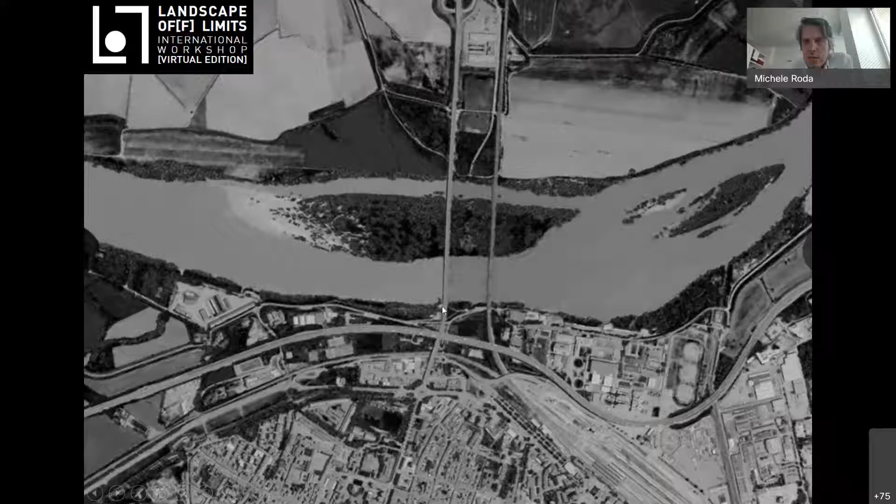So going into the theme, I think the contents of infrastructure in Piacenza. I'm giving you some slides, I think you can see it. The point is to understand this very chaotic and complex area we are trying to deal with. So the area in the northern border of Piacenza city, between the historical, more firm part of the city and the river, what's happening. And what's happening is a question to understand also the present role, criticalities and opportunities of the many infrastructures we can find there. In terms of urban design, we have tried to understand also what we need to focus on regarding infrastructures.

For sure, infrastructures are a question of accessibility. In Piacenza this is very clear. The different typologies of infrastructure meant in history, and mean also today, a strong level of accessibility. People can arrive easily, people can live easily in this area, people can see this area also traveling.

And this means also working about an area with strong permeability, porosity, and so accessibility. The second one is a question of impacts. Impact is not just something negative - there are some impacts that can also be positive. But for sure, infrastructure - and it's very clear on the natural environment, we can see also in this aerial view - infrastructure means strong impact in terms of pollution, for example, or noise. And this is what we are talking about, mainly about sustainability this morning.

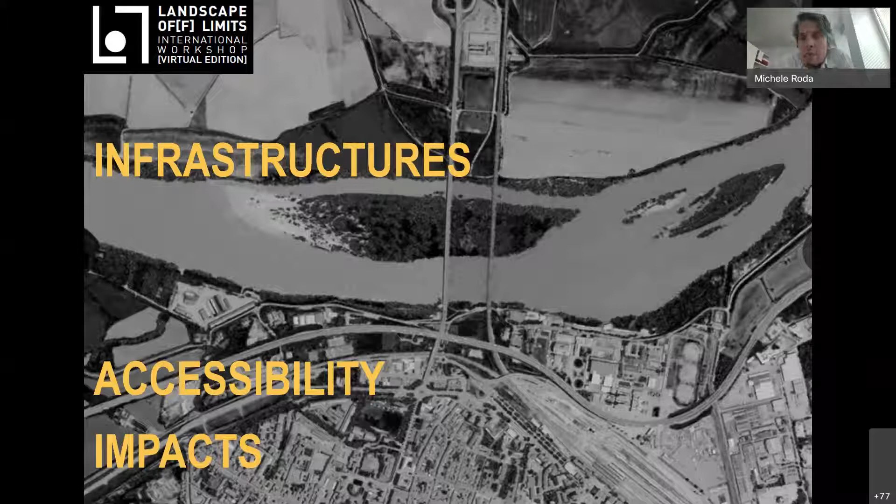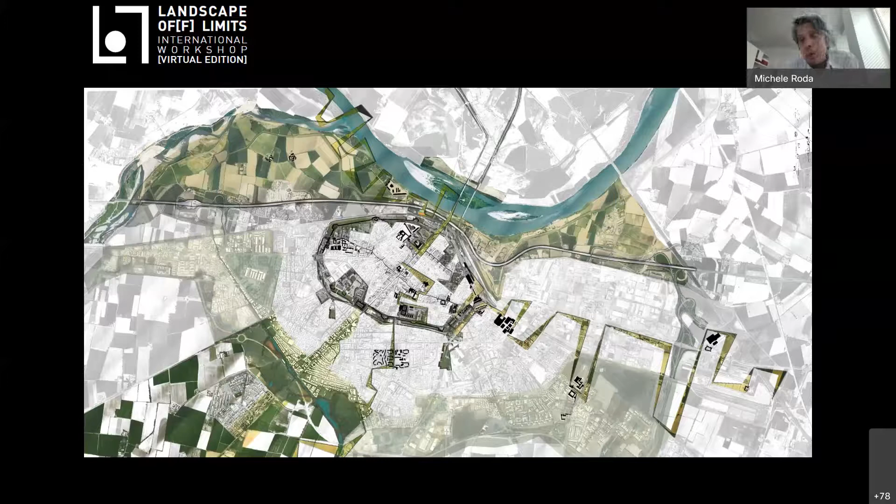It means also impact in terms of landscape perception. Imagine - we have seen some, now I'm passing through some images taken in Piacenza in these days. You can take also, if you are in Piacenza during this workshop, the viaduct, the bridges, the barriers are creating some limits, some important and strong impact on the perception. The area in this view - understanding the connection between the landscape elements, and exactly at this point where the buffer zone we are facing is becoming narrower and narrower, the infrastructures are condensing, they are more and more dense and intense, and the infrastructure are also defining a complex and contradictory relationship with the landscape itself.

So this is the play board of our workshop. We have discussed the opening on Tuesday, our work. We have talked about the two bridges. Now we are focusing better. We are talking also, and we need also this scale, because one of the highways in Piacenza is passing here. So Piacenza in the north-south direction is strongly impacted and characterized by infrastructure.

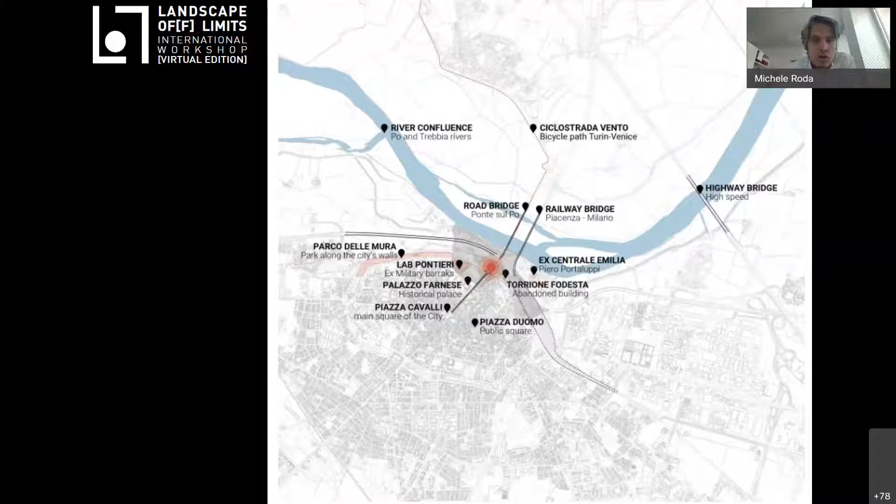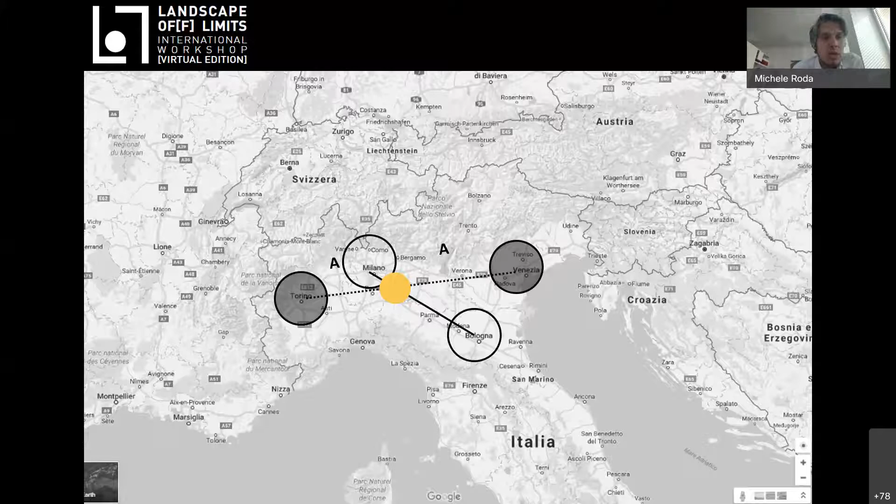This is the result of the strategic localization we have already talked about. Piacenza is in a sort of center, a sort of crux we can see in the cities and environment of northern Italy - between Milan and Bologna direction. Milan and Bologna direction is a part, a fragment of the backbone, we can say, of the Italian network system. So north-south, more or less, but also east-west, so Torino and Venezia, we can say Genoa and Venezia. But the point where these two axes are overlapping is very close to the city of Piacenza, to the area of Piacenza. We can see it also looking very briefly at some images.

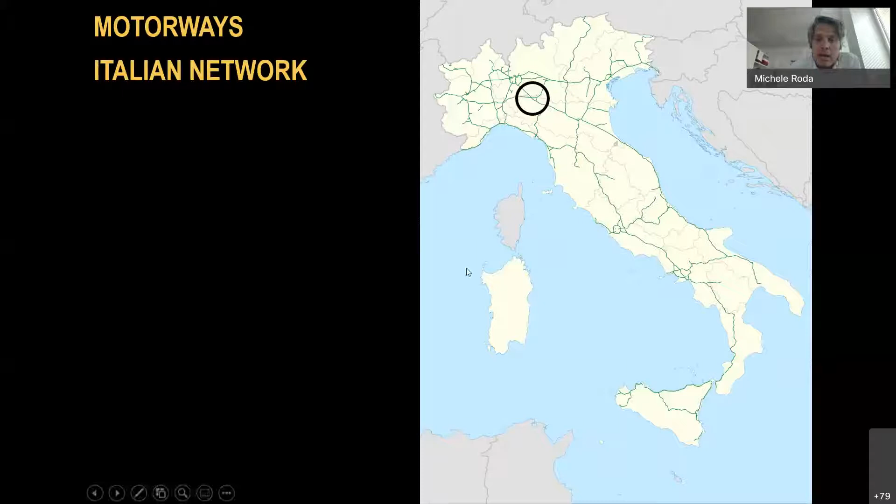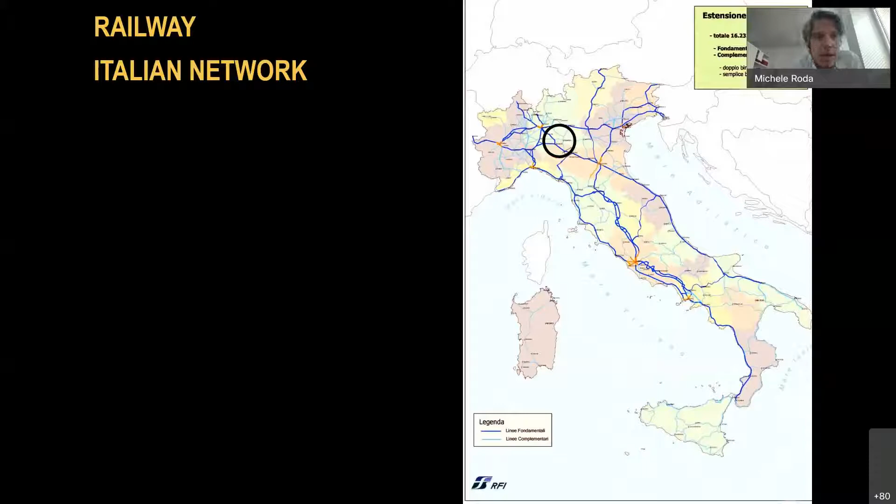This is the motorways Italian network, so all the motorways we can find in Italy. And the black circle, we can see deeply here, more here - two motorways are overlapping in this area. The A1, from Milano to Bologna, is this one, and the A21, called the Torino-Piacenza-Brescia, from Turin, Piacenza and Brescia - the overlapping, the cross of the two motorways, is exactly close to the city center. This means, I repeat, accessibility in my point. This is the reason for some of the characters and identities of Piacenza itself, but it means also impacts. It doesn't change - well, the strategic localization means also being an important node for the railway system. You can see here, in blue, the railway Italian network, where the blue lines are the most important.

Sorry, this image is not very good, but we can see that also in this case, Piacenza is the cross between the connection to Milano and Bologna, and the Piacenza-Alessandria-Torino line going west. The strategic localization of the node is very clear.

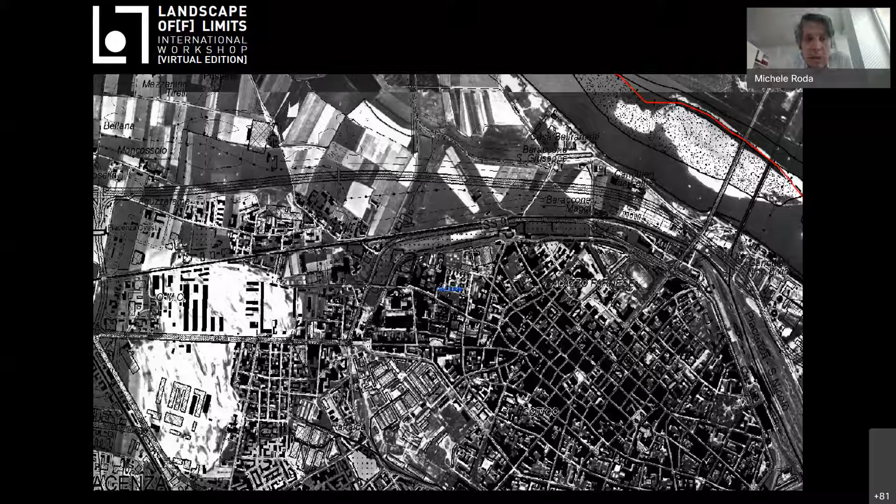What is the impact in history? We can see quite clearly in this image where we have tried to overlap the natural condition - we can see natural forms and shapes, and agricultural lands, which is a particular type of nature - but we have tried to put some of the lines, the motorway, the railway, overlapping on the territory. This crash, this meeting, created the contradictory and emblematic conditions of the area we need to face, and we are trying to show this, I think quite clearly, in this aerial view.

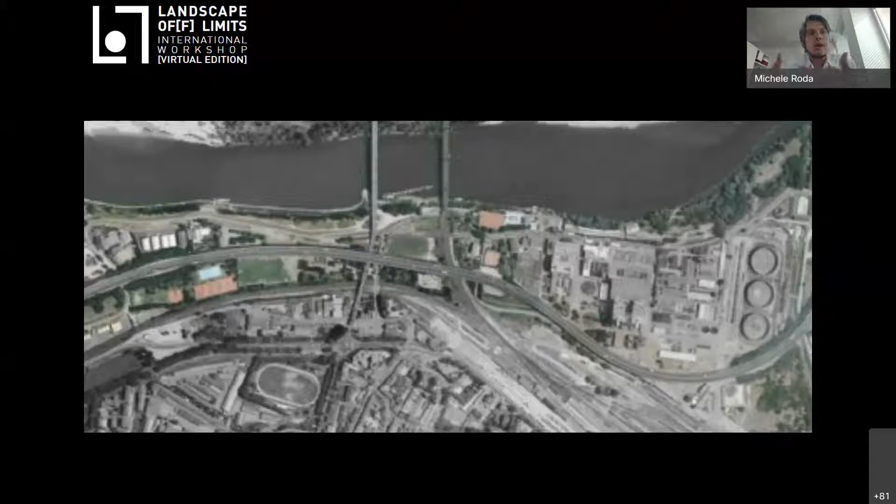Now we are trying to give a name to different lines. If you don't know quite anything, it's a sort of strange spider net of lines without hierarchies, or with very few hierarchies, with some clear direction: the two bridges bypassing the Po River, and with a main east-west direction of lines and strips. Each line has a role, each line has an identity, each line has a vocation. But what is important, from an urban design, landscape design point of view, is the overlapping and creating of a system of barriers. So let's go deeply into the different infrastructure, different lines, different elements we can recognize.

Let's start with number one, the most important I guess - sometimes we don't recognize that a river, the main Italian river, is an infrastructure. It's a blue infrastructure, we can say. The water flowing from here, from west to east, from the mountains to the Adriatic Sea, is a strong infrastructure, and is the main infrastructure you can find. An infrastructure that maybe today has no role and value in terms of economic travel and so on, but that it's a fantastic infrastructure opportunity in terms of landscape and natural elements, and also in terms of opportunities to improve the quality of the area.

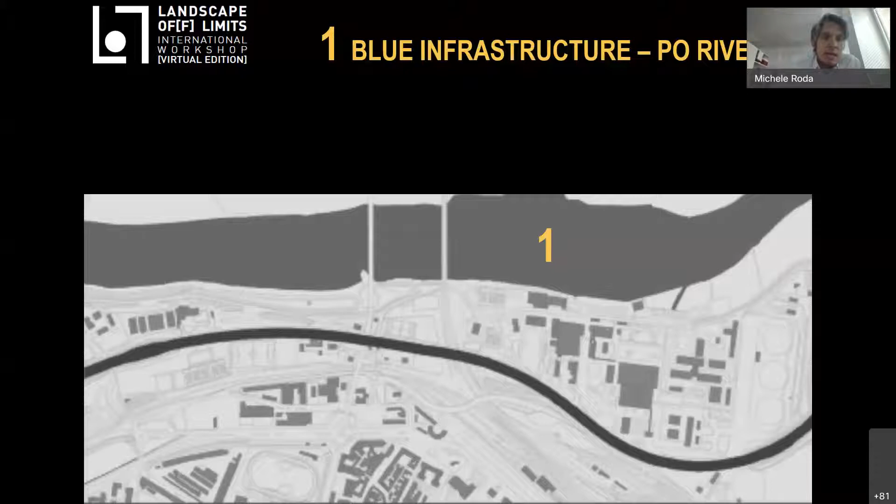We have two bridges, we can see it clearly in some images. Now I'm showing another image. The first one is the road bridge - that is not a motorway, I mean it's a normal street. It's a national level street, the so-called Via Emilia, along one of the historical corridors.

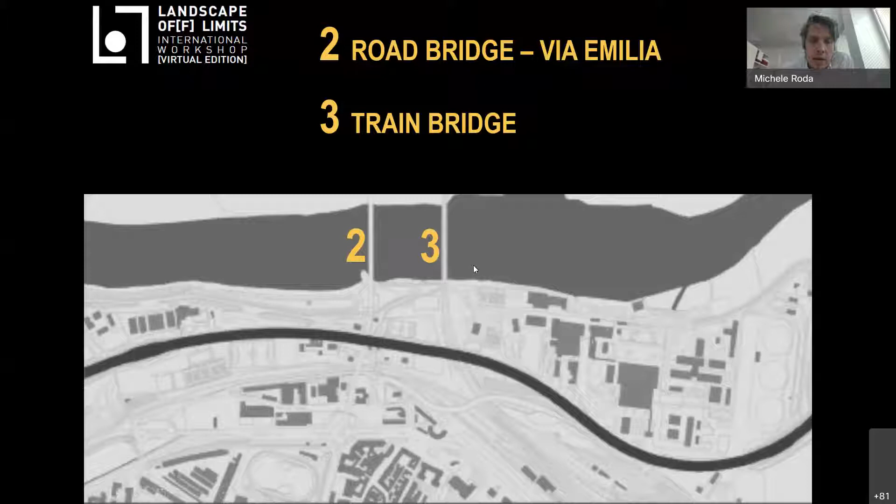It's a road you can also walk and ride on. And if you remember, on the first day we talked about the cycle path connecting north and south. So there are bridges connecting two sides of the Po River coast, connecting also two regions - Regione Emilia-Romagna on the south and Lombardia in the north. One is the road, as I said, and the second is the train, the railway bridge. This is an image I like.

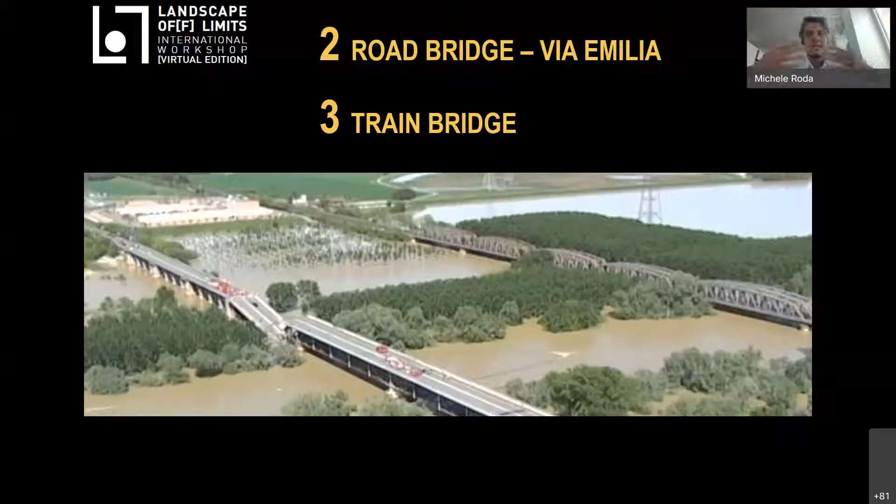This image was taken in 2009 when the road bridge collapsed during a flood. During the next month and year it was rebuilt in the same area. But I like this image because it shows that the bridge is not just the part bypassing the water on the Po, but the floodplain of the river is also larger - when overflowing, you can see it extends some kilometers long. The two bridges, the road one and the railway one, are also lines in the territory, creating strongly a direction, but creating also a sign in the territory at, let's say, a large scale view.

I have looked through some data - more or less every year, 5 million people are traveling on this line, not in the station but on this line. That is an important number. A lot of people are bypassing Piacenza, not stopping here, just traveling in the north to south direction.

Please take note that this is not a high capacity railway line. When, some years ago, 10 years ago, the TAV, the high speed train, was built on the line between Milano and Bologna, because of technical reasons the train doesn't pass through Piacenza station. So the trains run on a different line on the east part of the territory, meaning the high capacity line doesn't pass through Piacenza.

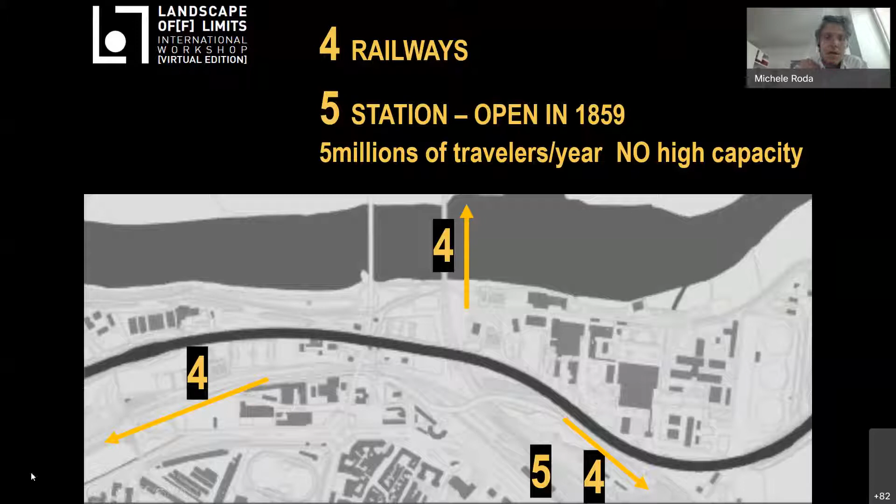But there is another line, a minor one, less used and less important in terms of flows of people, that runs in the east-west direction. From there some railways go to Alessandria, towards Piemonte. In terms of hierarchy, imagine this is the main line stopping in a station, this is the second line also arriving for sure in a station, and this is the reason for the node.

The area is also impacted by a very important viaduct built in the 60s, part of the A21 motorway. The A21 connects Torino, Piacenza with Brescia, in an east-west direction. It's not one of the most important motorways in Italy.

I found this data, which I think is quite updated: more or less 40,000 cars and trucks travel every day on this road, passing through the whole northern barrier of the city. More or less half and half - 20,000 cars and 20,000 trucks, for commercial activity.

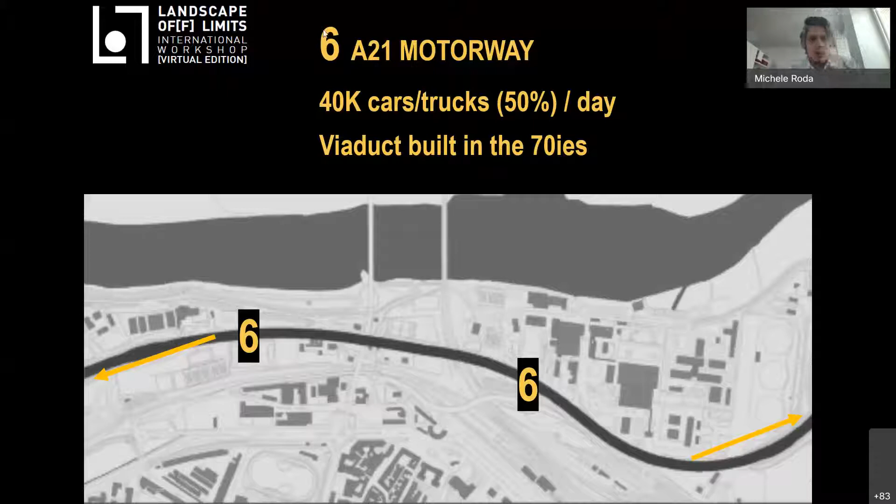This means that, also in relation to other motorways, the commercial role of this viaduct is very important. The viaduct, which is strongly impacting as we've seen in a lot of photos, was built more or less in the 70s. Then there is the national road network.

This is the one passing on the bridge - this is the image of the bridge that collapsed in 2009 that I was talking about - arriving here at the epicenter of our area, Piazzale Milano, the area connected to Milano. From here there is a Strada Statale, a national level street connecting the east part and west part of the city. The west part then becomes the Via Emilia, connecting the different cities along Emilia-Romagna, from Piacenza to Rimini - Parma, Reggio Emilia, Modena, and then Bologna.

Number 8 is quite important and strongly impacting as well - a sort of bypass, a new road built a few years ago, bypassing the railway. As you can imagine, this network creates a condition of overlapping and contrast. The problem was that because of the railway line it was quite impossible to get with the normal road network from the southern part of the city to the northern part. So this bypass was built, which we can see now in some images.

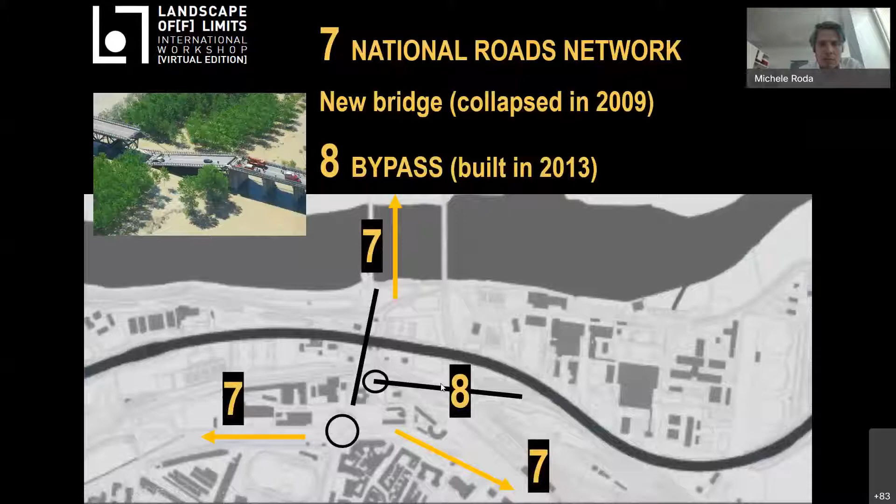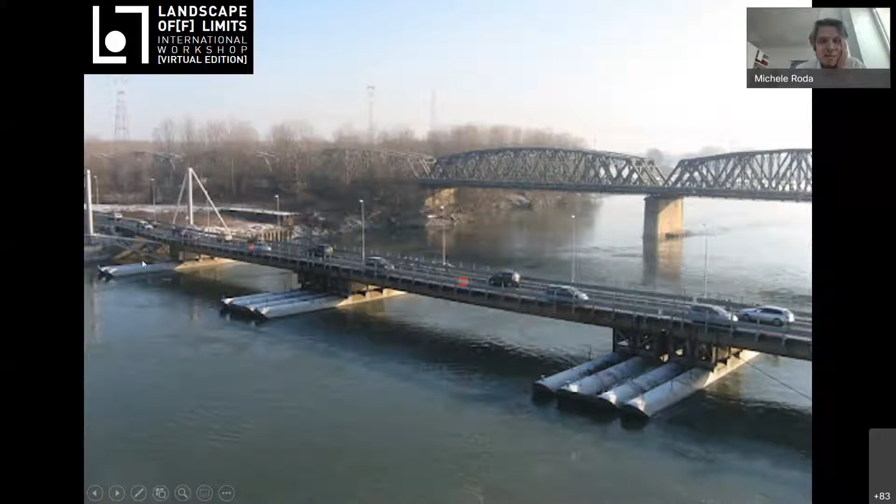This is another very exemplary and emblematic image taken when the bridge collapsed. For a period a temporary bridge was built on the river - you can see the temporary boat bridge here and the railway bridge here.

Now I'm passing through some images, trying to give a sense of the impact of infrastructure in this part of Piacenza. This is the beginning of the road bridge, and this is the viaduct of the A21 motorway. The impact of the viaduct is not just the presence of a barrier, but also this phono-absorbent element - I don't know if that's the right name - able to protect the city, but creating an impact in terms of landscape, as you can see.

Because of the different levels I mentioned earlier, we have a lot of bridges. This is a bridge at the Po level, and we can see the urban level, and the new street level.

This instead was taken at Rione Fodesta, one of the identity elements you are also called to involve in your project. We can see the recent bypass, the last part of the road system built, this one here. As you can imagine, maybe it works in terms of technical and transportation systems, but it creates an element blocking the view, strongly interrupting the connection from the city to the river because of this infrastructure system.

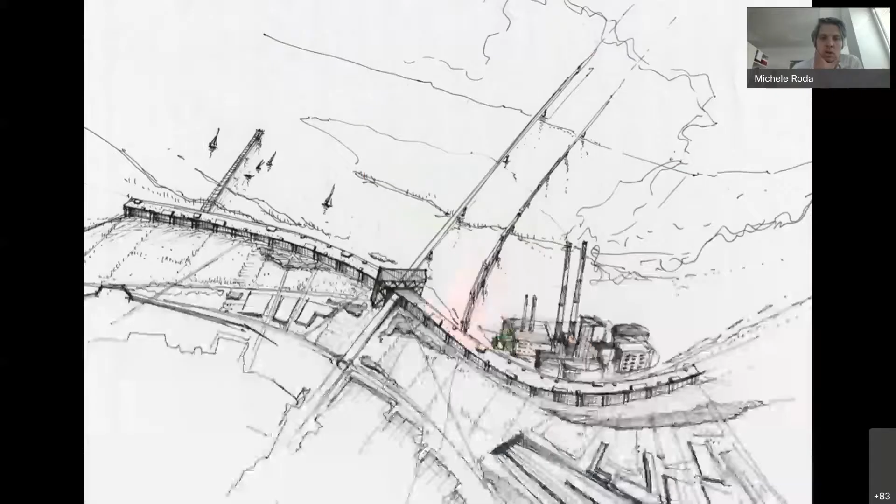These are just some images taken to let you understand this limitation. That concludes the last two slides - now I'm giving the floor to the colleagues, who will focus better and more deeply on the contents of infrastructure and sustainability.

These images are taken from a recent experience we had in Piacenza, Politecnico di Milano, in some workshop. This was a project made by some students working on a transformation of the viaduct. As you can see, this is the line of the A21 motorway with the two bridges, and this is the anchor point from the city. The idea is that it's possible, as you can see in this image, to think of infrastructure in terms of landscape.

Edoardo will later talk about this point. Our role, our effort, has to be addressed to understand how this complex and contradictory condition can be transformed through our work, which is urban design. So I hope I introduced this morning session in the right way.

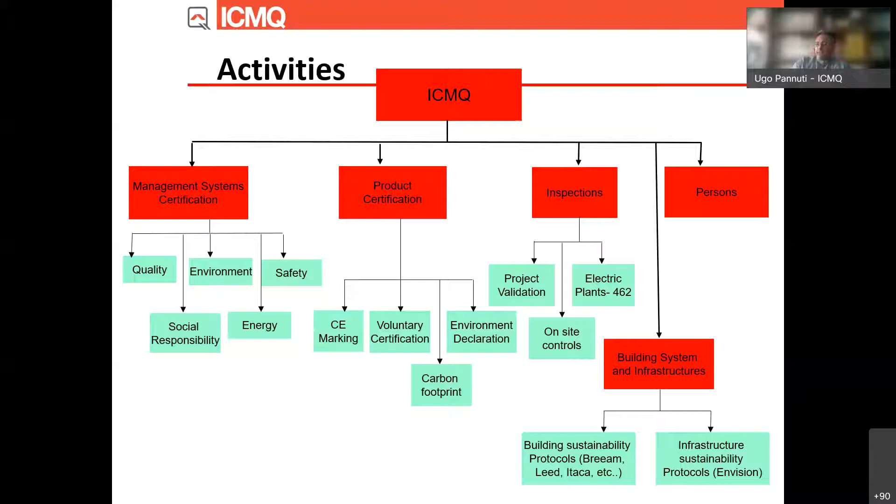The key point is to design in a sustainable way. But what is sustainability? Sustainability is the intersection of three spheres: the social sphere, the economic sphere, and the environmental sphere. Each of these spheres is linked to a word: social is linked to people, environmental to planet, and economic to profit. So if we design infrastructure, a building, or a product taking into account the 3 P's—planet, profit, and people—we are designing in a sustainable way.

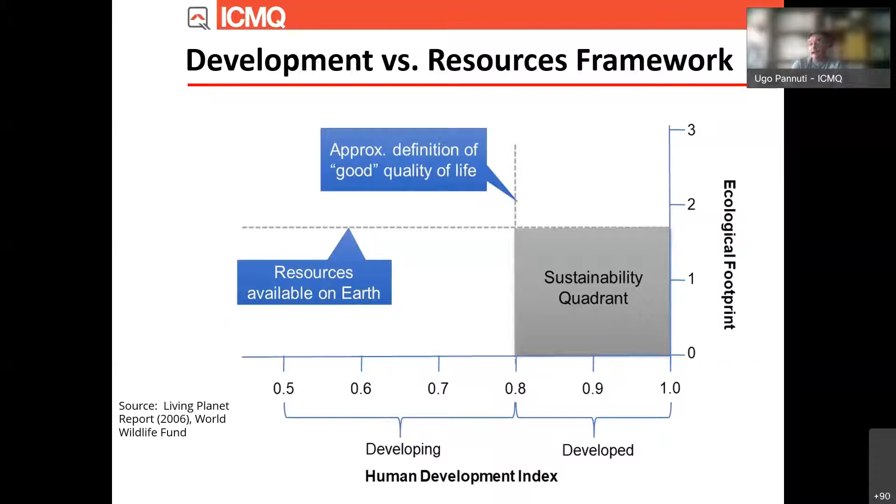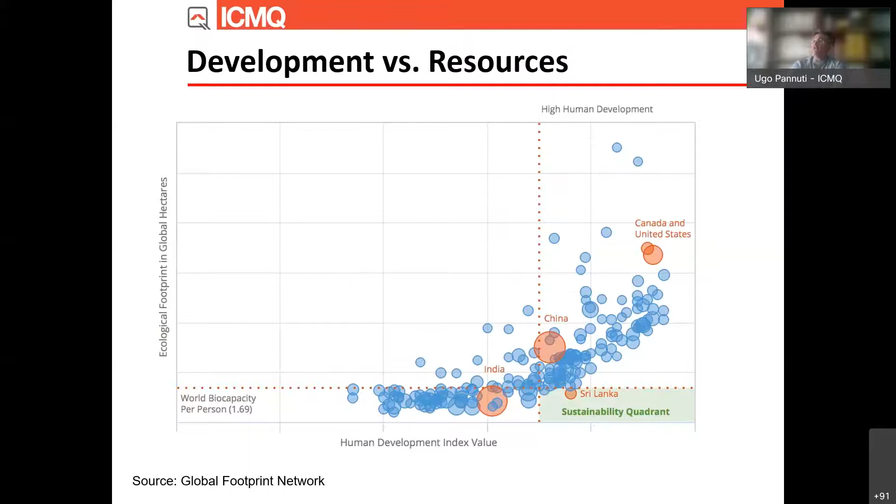and the horizontal line at about 1.7 hectares per person. In this sustainability quadrant, I have a good quality of life and I don't consume large resources. If I put some data in over the years, I see that there are some countries that don't have a good quality of life and don't consume resources, and there are a lot of countries like Canada, United States, and others that have a good quality of life but consume a large amount of resources. So the challenge is how we approach this problem to move into the sustainability quadrant.

Some manufacturers approach this problem from a micro approach, with micro changes and product-level strategies. We know a lot of manufacturers involved in the sustainability field that design products with, for example, an Environmental Product Declaration, EPD, or carbon footprint declaration, to account for environmental impacts or carbon footprint impacts. Other manufacturers would like to manage their company system with a standard, ISO 14001 environmental management system, and other manufacturers or public administrations would like to approach the problem with macro changes, through infrastructure design. Envision is the protocol that helps us approach this problem in a sustainable way.

Infrastructure is important because it brings goods to the market, for example workers to their jobs, or children to school.

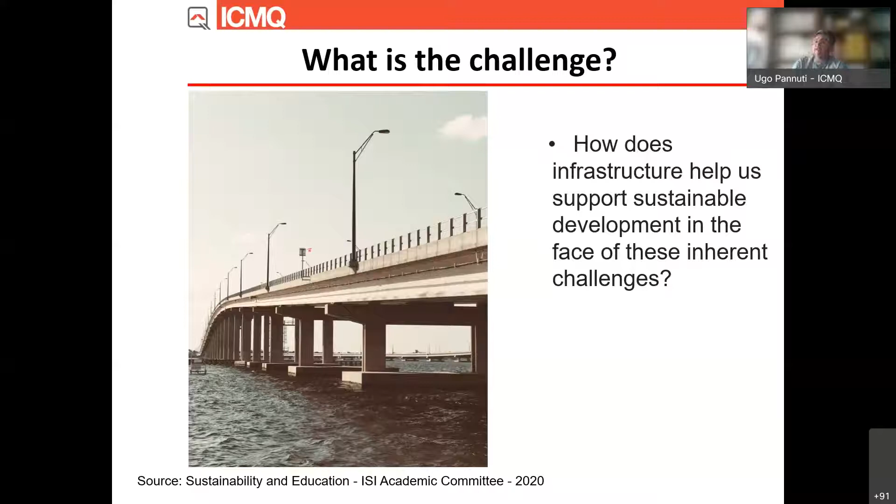So the infrastructure is important to have a good quality of life. But it's important that these social benefits are maintained over the long term, without a big consumption of resources. So it's important to consider the life of the infrastructure, because we have different years, for example 20 years for highways to 100 years for dams.

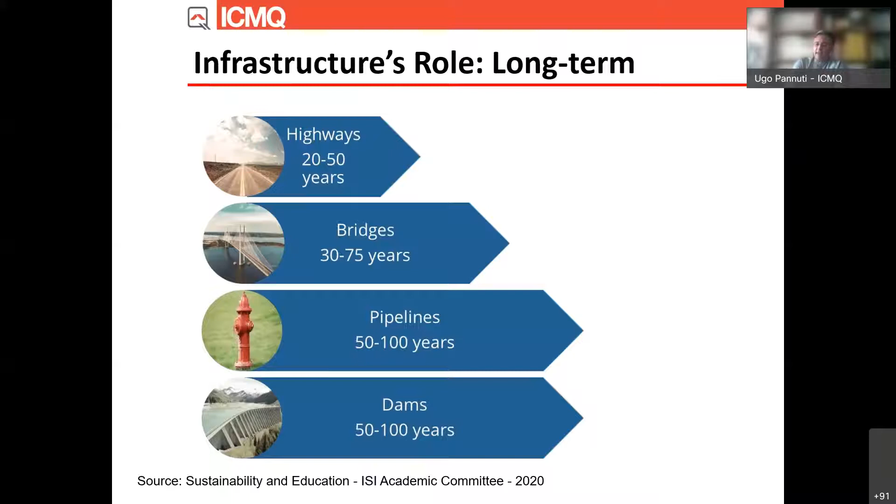So it's important to take into account the life of the infrastructure to design it in a sustainable way. To close this short session, I'll report some strategies for changing the industry for designing infrastructure in a sustainable way. To make incremental improvements, it's important to approach the design without aiming for a big level of sustainability all at once. I think it's important to move the design forward step by step.

Use a standardized tool and metrics. The Envision protocol is the right tool, the right standard, to document sustainable practice. Monitor performance over the years, to have a good economic approach to the design. Sharing lessons is a key point for infrastructure design. And have a global view while keeping in mind local values, the quality of life, and the local point of view of the infrastructure. It's important to design the infrastructure this way.

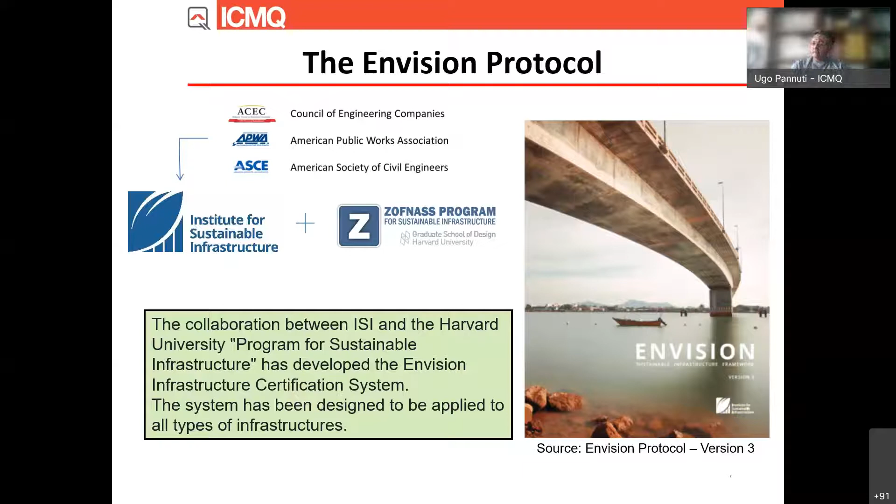In Italy, ICMQ made an agreement with ISI, the Institute for Sustainable Infrastructure, to develop Envision and spread the protocol in Italy. ICMQ performs its activities with the Envision protocol as a third-party independent certification body. At the moment we have verified some important projects, we have qualified some professional competence, and we perform training and qualification.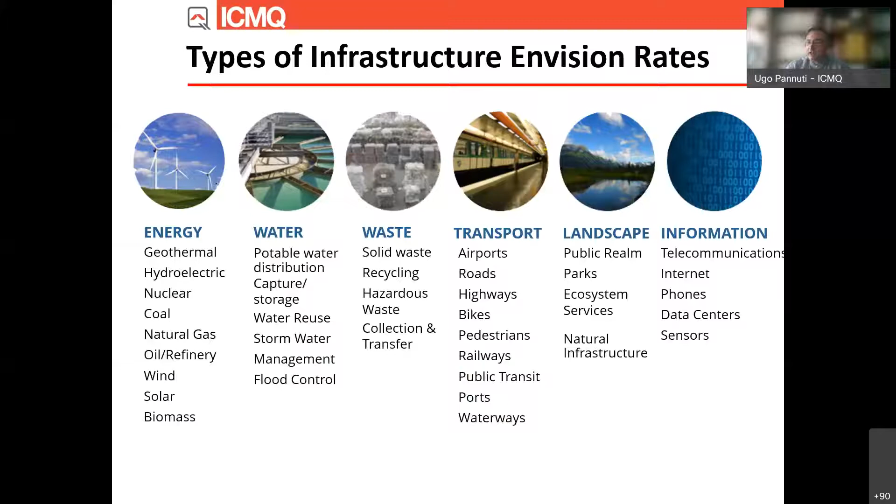Envision can be applied to all types of infrastructure. It's the equivalent of LEED for buildings. We can apply the protocol to energy infrastructure, water infrastructure, waste, transport, landscape, and information infrastructure. It's composed of 64 credits subdivided into 5 categories.

You can see that the categories are quality of life, leadership, resource allocation, natural world, and climate and resilience. I think, I'm not sure, but I think that the resilience key point in climate and resilience is a point that doesn't exist in other protocols. I think Envision is the only protocol I know that performs its activities with consideration for the resilience of the infrastructure.

I'll show you some information about the categories. The first one is quality of life. It's divided into three macro categories: well-being, mobility, and community. It's important because I design infrastructure thinking about the community. How can I design the infrastructure taking into account community needs? How can I improve the quality of life of the community with my infrastructure? This is an important category.

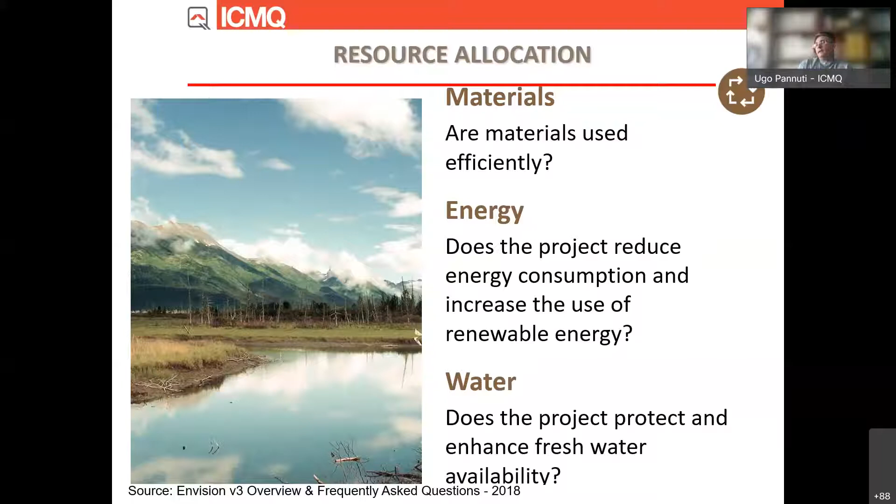Resource allocation is about the materials. My thinking is that a sustainable infrastructure is composed of sustainable products. So we have materials, energy, and water, taking into account the certification of the materials that I use in the infrastructure. I award points for the environmental product declaration of the materials I put into the infrastructure, or for activities that can achieve energy saving or water saving.

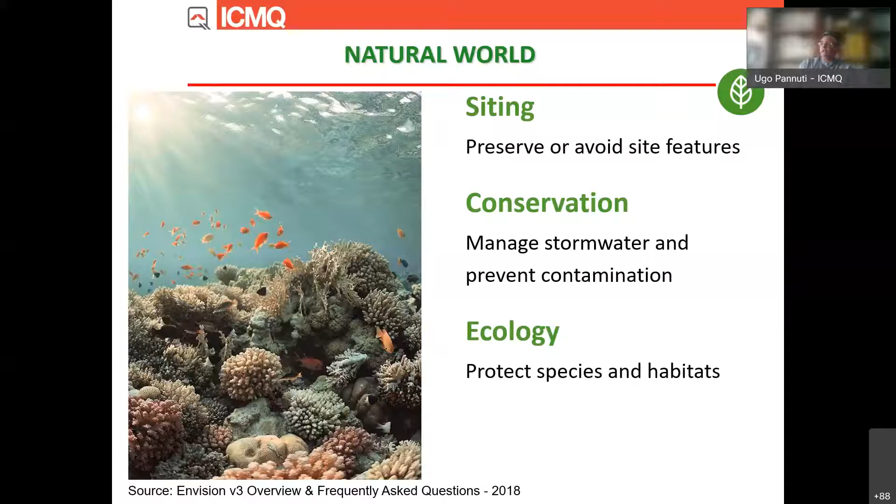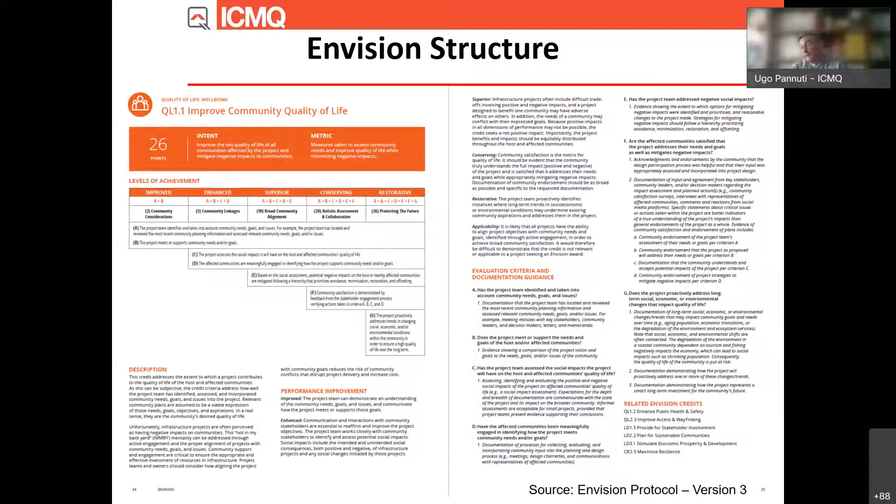Natural world is about the effect of the project on the preservation and renewal of ecosystem function. We have three macro categories: siting, to preserve or avoid site features; conservation; and ecology, about protecting species and habitats. Last but not least, climate and resilience is about minimizing pollution and managing risks of the infrastructure. Every category, every credit, is composed of a title, points, the maximum value of points I can achieve, the goal and intent of the credit, and the metric.

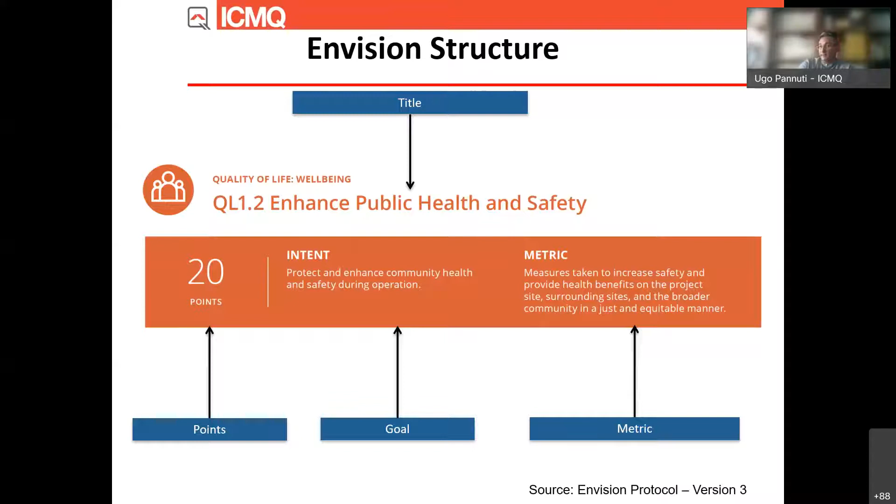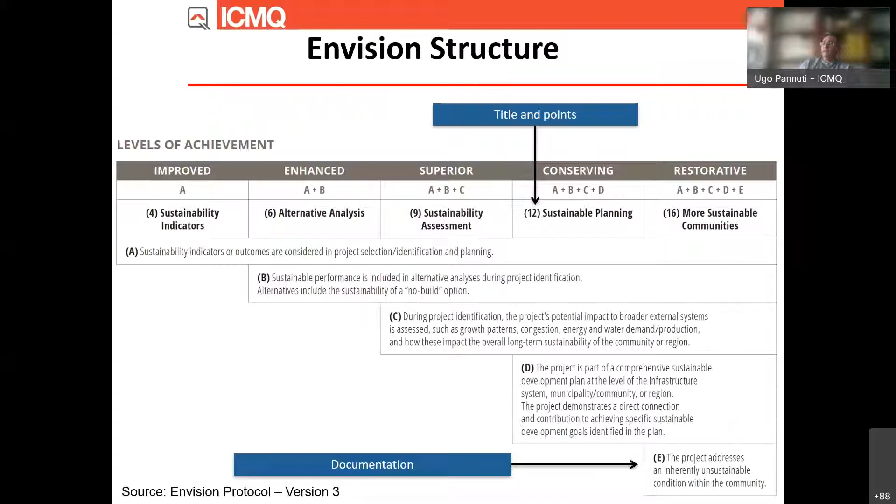How can I measure, in this case, the quality of life? I have to document the effective levels of achievement. We have 5 levels of achievement: improved above the conventional, enhanced - I am on the right track for designing, superior but not net zero, conserving - I have zero negative impact, and restorative - I restore systems with my design.

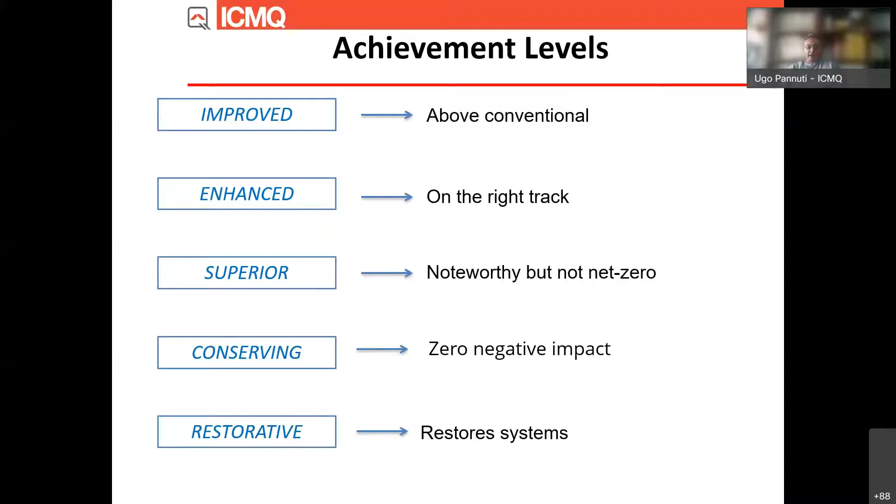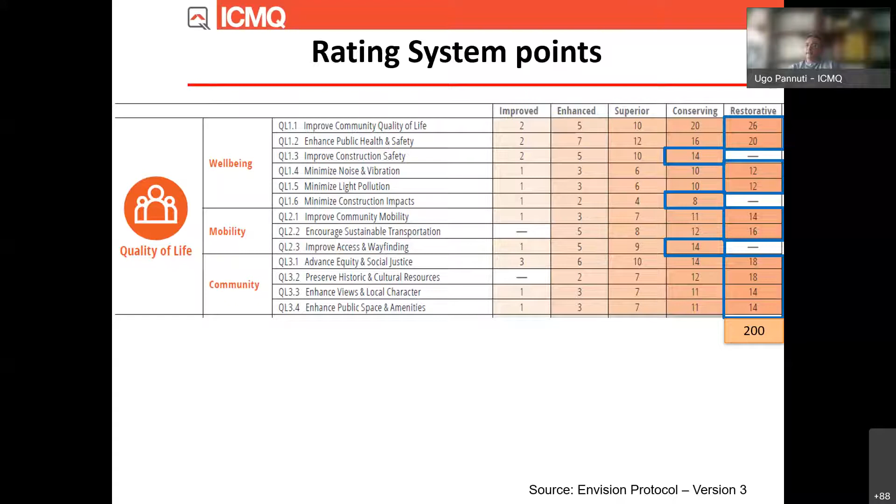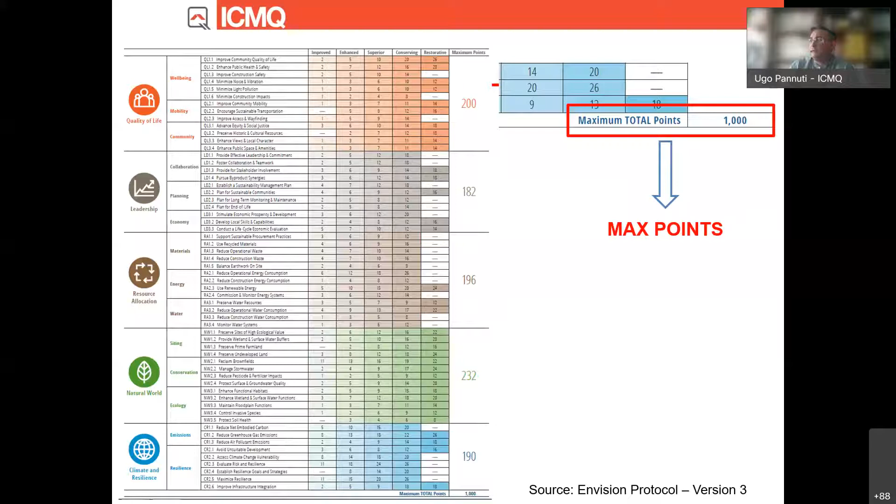Every category has a maximum number of points. If I sum all the points of all the credits, I can have the value of my sustainable designing, and I can divide all the points by 1000, that is the maximum value of points that I can reach. We have the level of certification.

Verified if I have 20%, silver 30%, 40% gold, and 50% platinum. It's very hard to reach the verified level, but I know that if I have a verified certification, I am designing an infrastructure 20% better than the standard benchmark.

The certification process is divided into two paths. Pathway A, design plus post-construction, and pathway B, post-construction. In the first pathway, we have two steps of certification.

We have a certification after the design phase and after the post-construction of the infrastructure.

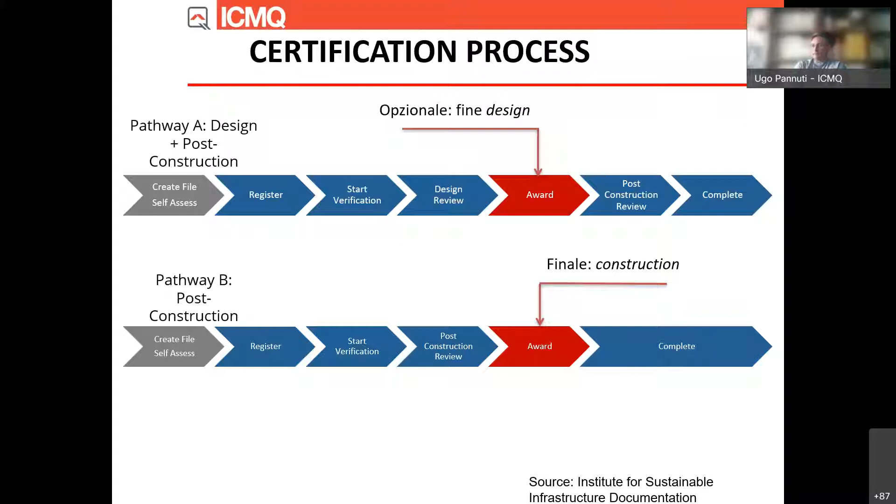ICMQ performs training activities to qualify the competence as Envision Sustainability Professional, Envision SP. That is an important point of contact for the project team with the certification body, with ICMQ.

The Envision SP is an expert of the Envision protocol. It is important to achieve, to reach all the levels of achievement. The process of qualifying an Envision SP is composed of two steps.

We have a training course and an exam in double language, Italian and English, with 75 questions. To have the qualification, the candidate has to answer correctly 75% of 75 questions. And then we have an annual maintenance of the qualification.

In Italy, ICMQ has developed some documents very fast. We have developed guidelines for the application of the Envision protocol to Italian railway infrastructure with Rete Ferroviaria Italiana and Italferr. We developed an alternative compliance path document, how to apply the Envision protocol in Italy.

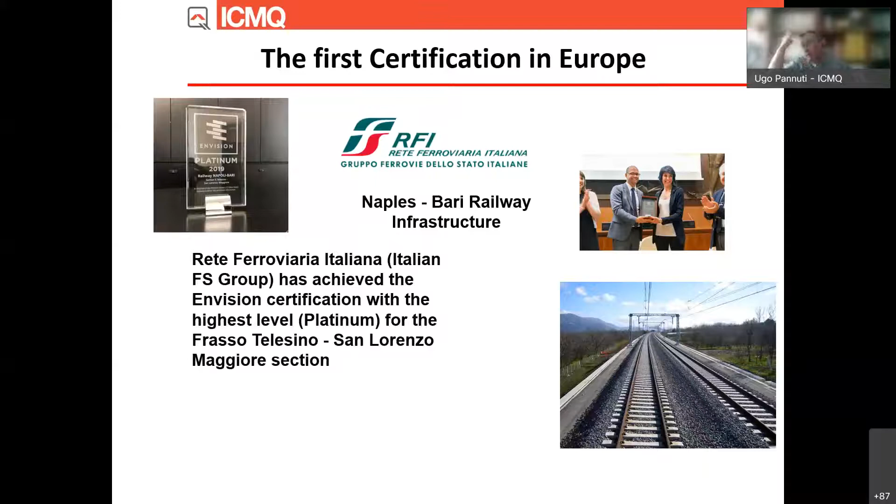part of the Naples-Bari railway infrastructure with Rete Ferroviaria Italiana. They achieved the platinum certification. Another certification with Edison's Vaglio wind farm, a gold level.

The third certification is about Impresa Trevi with Life Marina Plan Plus, that is a structure under the sea, the Adriatic Sea, for coastal management, with a silver certification.

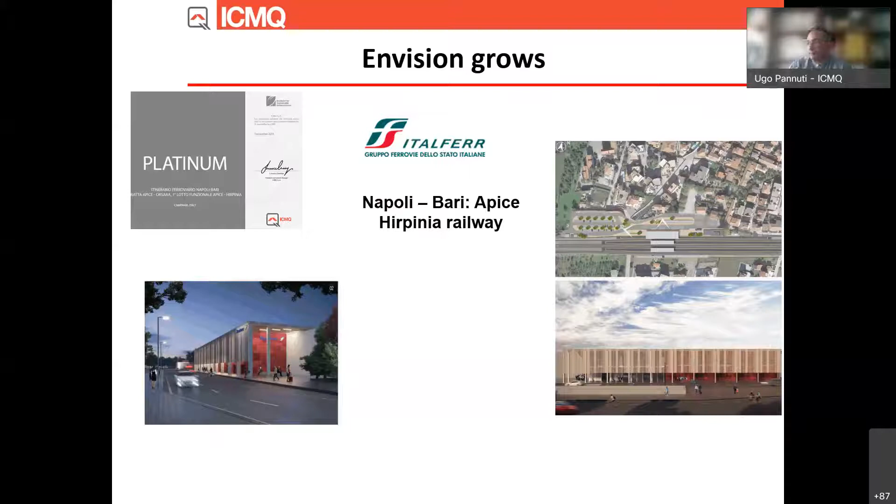And we have some other certifications: another part of Naples-Bari with platinum certification, Edison with another two wind farms in Abruzzo, platinum certification. We have some registered projects almost ready for the certification phase, railway for the connection of Marco Polo Airport of Venice,

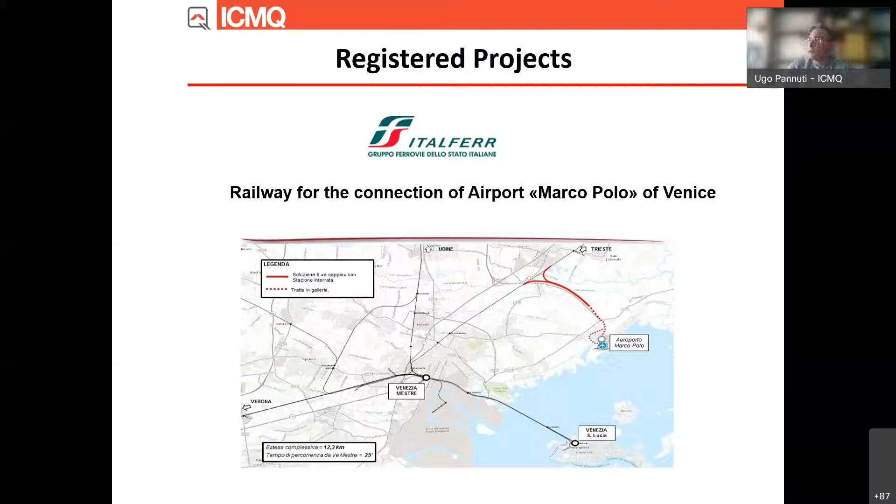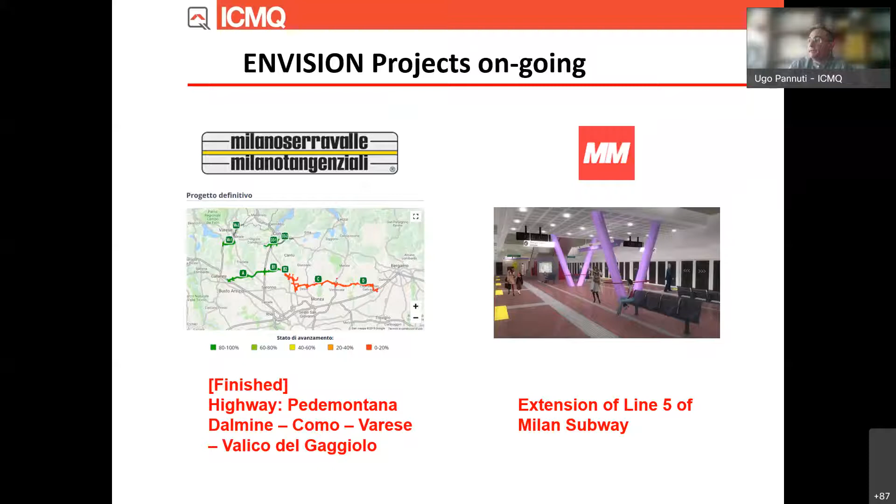Milano Serravalle, it's finished. We have performed a preliminary assessment of Pedemontana with MM, ex Metropolitana Milanese, extension of line 5 of the Milan subway. We have some other projects of Rete Ferroviaria Italiana: Porta Garibaldi Station, Piazza Freud in Milan, Frosinone Station, Porta Romana Station, and the high-speed railway in Florence with the station.

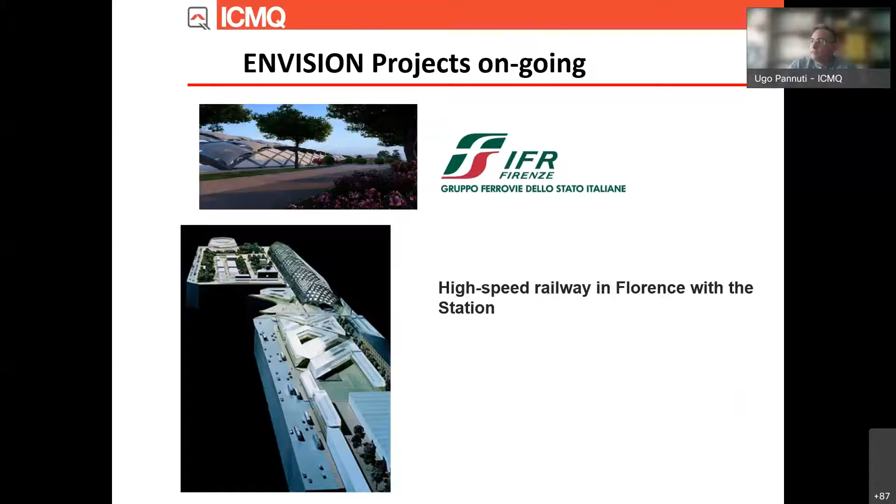And in Europe, we have performed a preliminary assessment of a dam with Seacon Engineering.

I have finished. I hope that the time is okay. This is our reference. If you would like to have some information, you can take a look at our website, Envision Italia. And if you need some information, you can write to me. Thank you very much.

Thank you, Ugo. And please, everybody should be aware that ICMQ is exactly in front of the Bosco Verticale. So if you go and visit them, you can see the Bosco Verticale, that is the well-known skyscraper in Milan, full of vertical wood, isn't it?

Okay, so I'm ready for my presentation. What everybody has seen in Ugo's presentation is that Envision is a protocol that has a very broad field for being applied. So, okay, now I can share.

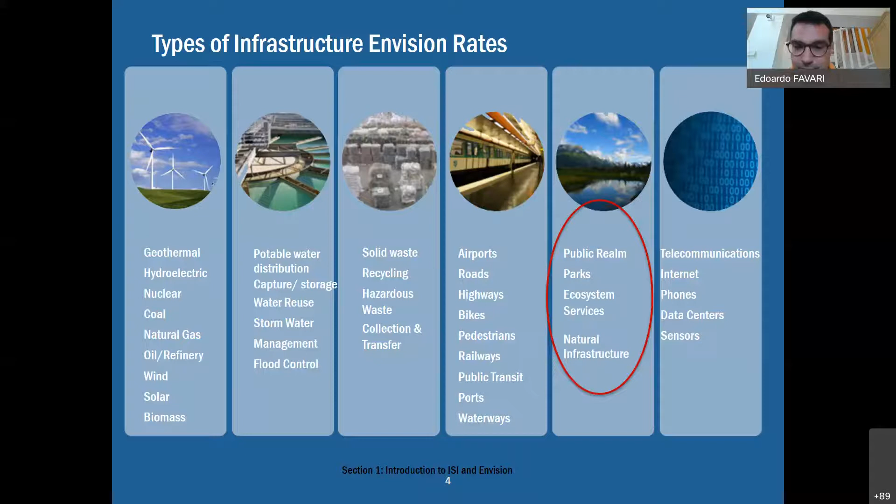So in particular, here just to let you see that it is perfectly suited on purpose for landscaping, and you see, from Ugo's presentation, that there are so many credits - you see 64. It's really a lot.

When you apply Envision, you have a sustainability professional who helps in applying and identifying the solutions. And for each credit, you have to see what can realistically be done.

If you don't have a brownfield, if you don't have waste in your project area, you can't get, for example, the maximum level for reclaiming brownfield, as you see in conservation credit 2.1.

So obviously you have to select some credits and decide how to focus on them. You have some hints from the Envision manual, and obviously you have to go into depth and find your own solutions.

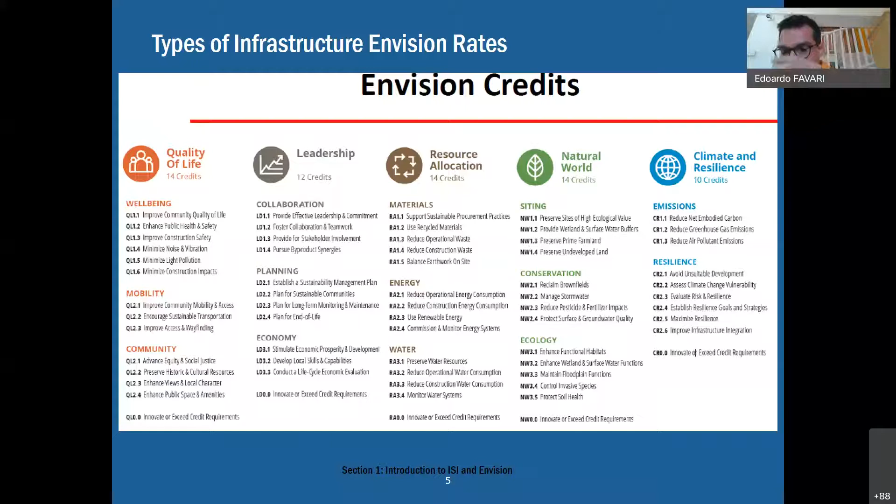Another point that Ugo pointed out, which is very meaningful, is that Envision has been developed in an American context. So, for example, if you apply it in Europe, and specifically in Italy - since we are thinking about Italy at this moment - you have to see what requirements and standards can be applied to your project.

The first project I want to talk about is the Willingdon Linear Park, built in Burnaby, British Columbia, Canada, which got the silver achievement in 2019. It consists of more than 1 kilometer of linear park, spanning 13 blocks of the city.

There's a level description that also talks about asphalt, which is something that maybe isn't usually relevant when thinking about a landscaping project. In this case, the asphalt has been reclaimed—the same asphalt that was already used before the park was built has been reused for the new one.

What has been done is taking an area that was not used, was overgrown with vegetation, and it has been transformed into a park that is qualifying so much for this city.

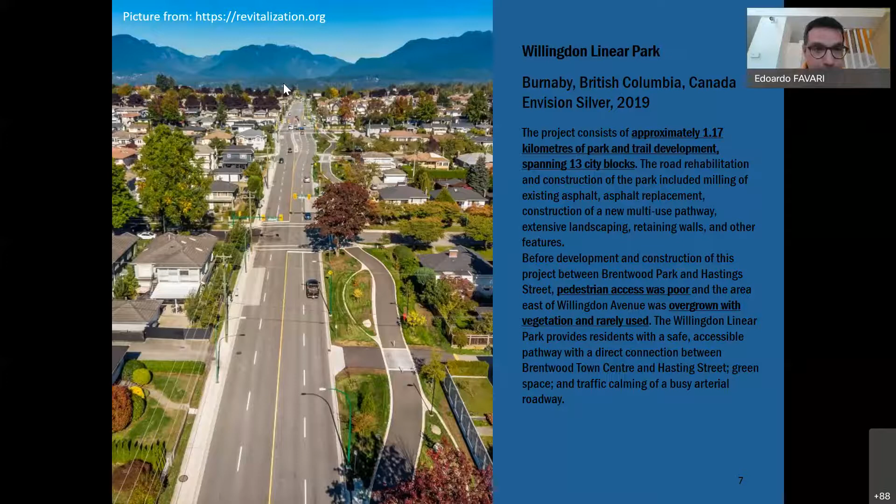You see the linear park, the 13 blocks can be seen here. As it is linear, mainly you have pedestrian paths and biking paths. In some points, it has been possible to enlarge somehow to include extra facilities for meeting, gathering, etc. I think that is interesting.

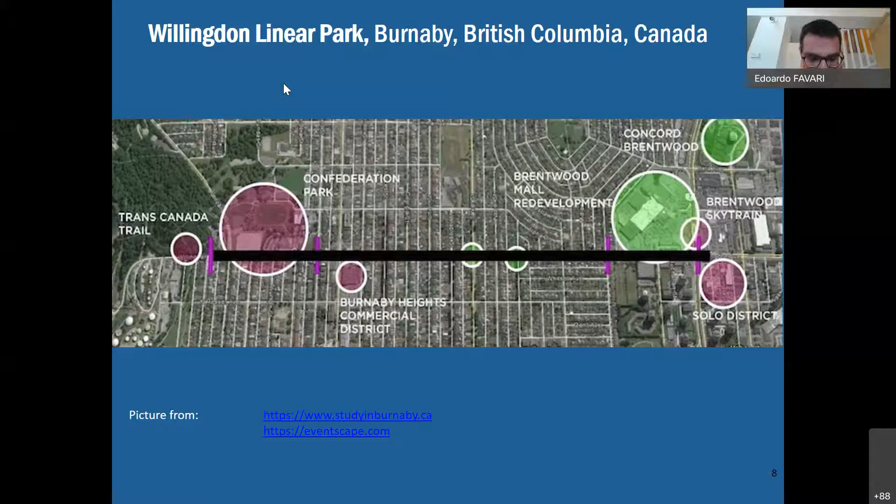If you see the references below, one of the pictures has been taken from a study in Burnaby. So it is something that makes the city more attractive also for students.

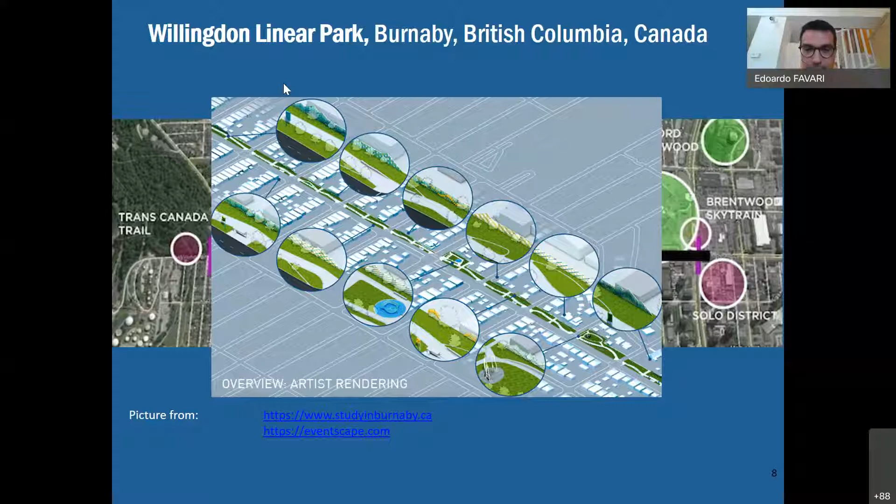Regarding the part of quality of life, you will see for each case study some highlights that describe what has been done and what is outstanding for this project.

Here, nothing exceptional, you see. For example, there are new pedestrian signals that improved accessibility and safety for pedestrians. Again, biking and walking pathways.

Feel free to raise questions. In addition, as I mentioned, where possible, there have been built pocket parks—some space for gatherings, for chance encounters, and for quiet solitude.

So this is what has been done. Nothing exceptional, I think everybody's thinking—just this, and they earned a prize from Envision. The point is that if you apply a rating system, you are spurred to do one step more. Usually during a project review with Envision, you are spurred to do more and more because you ascend the level of achievement on the specific credit.

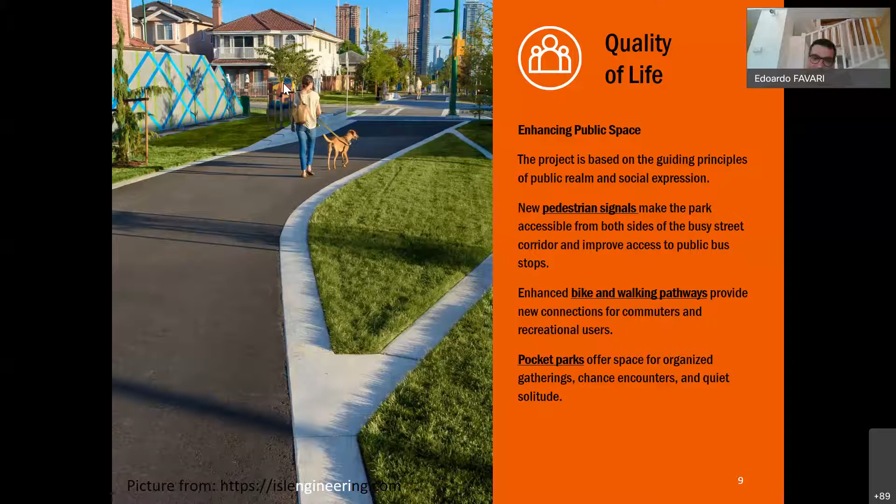Another topic that often is not considered as much in normal projects is the control of invasive species. Invasive species are plants that are not local—they've been imported in the past, and then they spread so much, almost outcompeting local, non-invasive species.

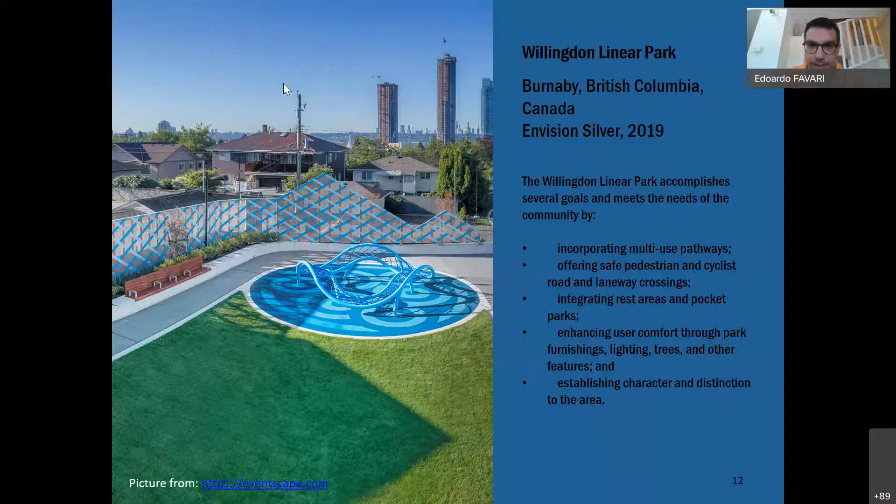Another project I want to talk about is the Albion Riverside Park in Los Angeles. It is a pretty big park because it's 10 acres, which is about 40,000 square meters, and it is adjacent to the Los Angeles River.

For this project, there was an industrial area next to the existing park that was degraded, not that nice. The Los Angeles municipality acquired the industrial area, improved the situation of the area, and increased the open space and recreational opportunities of the park.

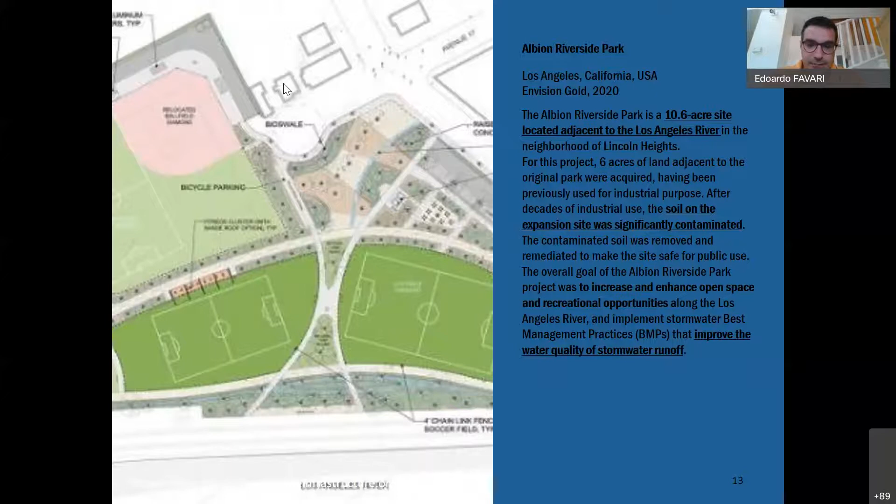Another goal of this project was to improve the water quality of stormwater runoff. It is very related to climate change. Everybody knows that there are big storms, and stormwater comes all together in a short time. The management of this event is critical for the resilience of the project. Another goal of this project was related to that. You can see that it is a pretty big area with so many recreational facilities and several trees.

This is a map that you will see in the presentation. I made this presentation available.

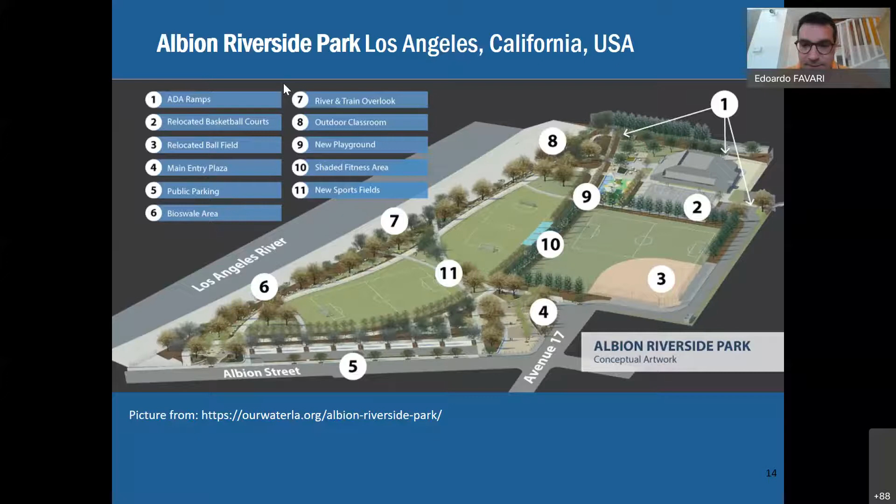This is a picture. One topic that has been outstanding in this project has been the quality of life. Obviously, such a park that makes available a baseball field, 3 soccer fields, a basketball court, a plaza and space for events, trails, fitness area, etc. improves the quality of life of the quarter. In addition, ADA compliant ramps improve accessibility for handicapped people.

So this is another topic that has been approached. Quality of life is something that has been considered outstanding.

One topic that has also been considered outstanding is the leadership part. According to my experience in project management, and particularly in sustainable projects, the importance of leadership is always underconsidered.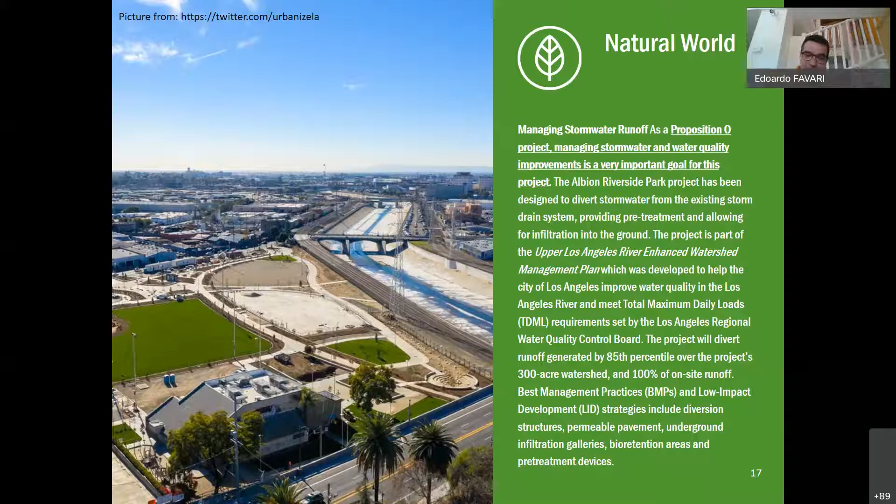Again, it is nothing brand new, it is not something unknown to us. But if you apply the protocol, you are spurred to go the extra mile, one step over. So at the end, in this case as well, it got the gold Envision prize.

Water quality was one topic that has been really outstanding, and in addition, the park is very relevant for the local community, improving climate change adaptability and reducing the risk of flooding in the area.

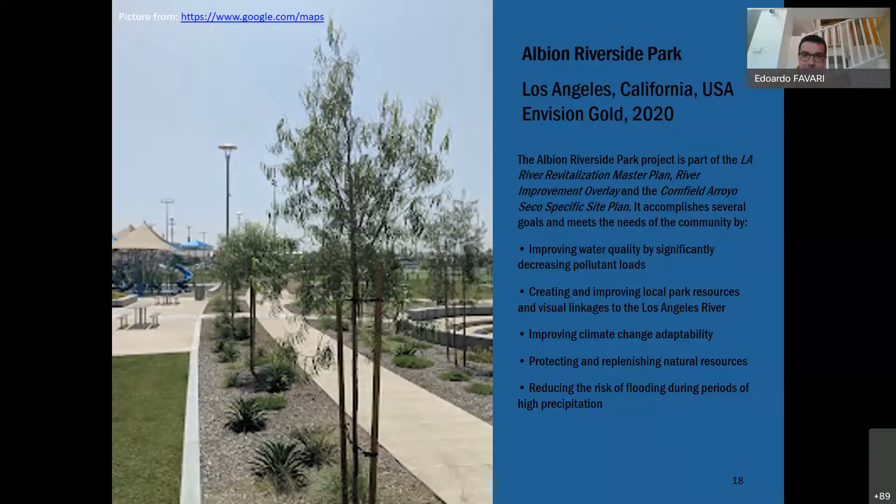Another project that is also interesting, according to me, is the Starlight Park that has been developed in the Bronx, New York City, which also got the gold achievement from Envision last year. It is a very big project that has been developed and is being developed actually in 3 phases. $41 million is a lot for a landscaping project. As you can see in the map, you see the Bronx River all along, and on the left there is the area that has been part of the project.

The project includes a restored shoreline, boat docks, soccer field, and a playground in phase 1.

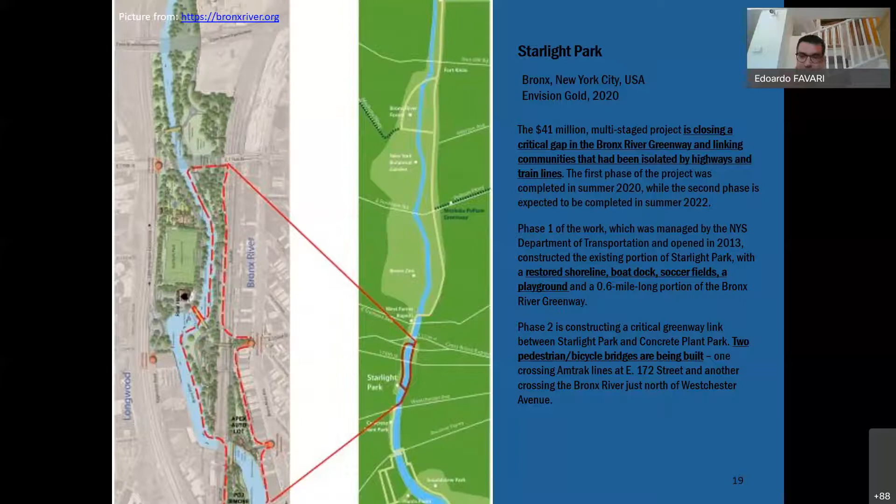Phase 2 is more related to linking the two sides of the river. Two pedestrian and bike bridges have been built, and the third phase will include another bridge.

This is an aerial picture of the park. You can see that there is a highway running along the park. So as Michele said in his presentation, it's always something—it's like a wall. This kind of infrastructure, if you succeed in connecting the different sides of the park, obviously you do a lot for the community.

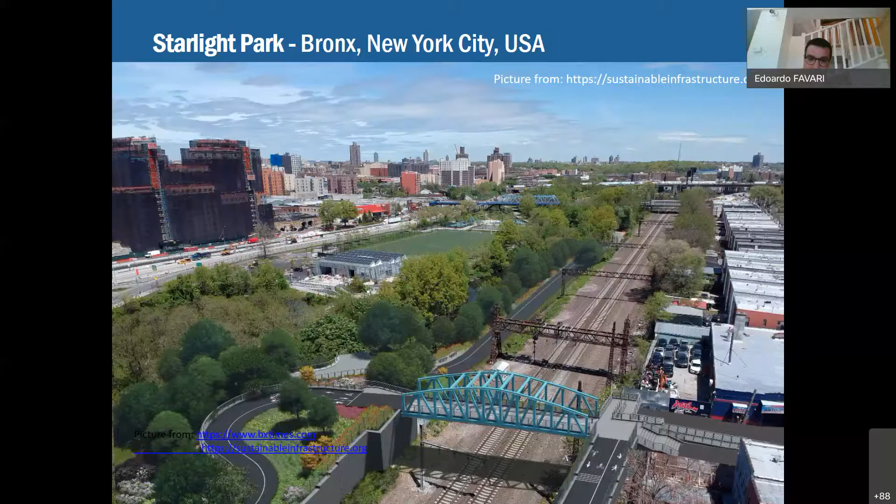In this case, you can see phase 1 and phase 2. A lot has been done for linking the community.

For quality of life, as I mentioned, there have been built some bridges.

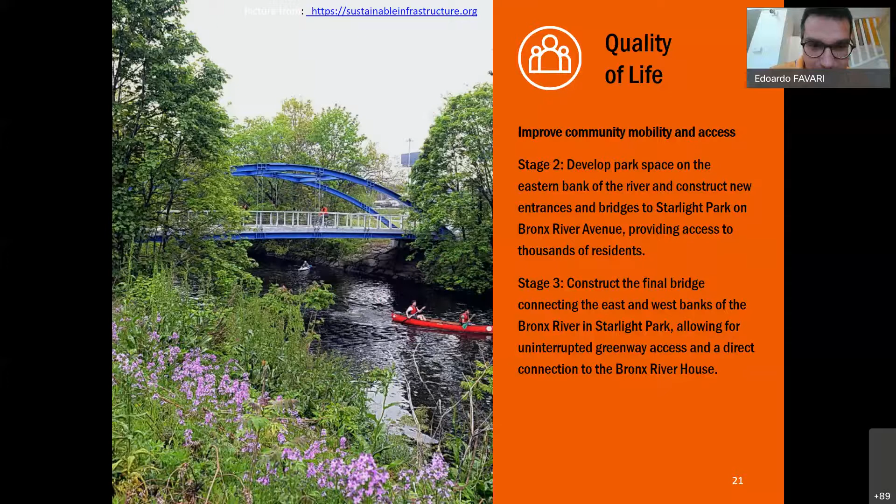Oh, it's okay. How much time have I got, Michele? How can I speak again? How many cases do you have? I don't know, 10 minutes is fine. Okay, okay.

Regarding the natural world, an abandoned industrial area has been changed into a green space, so it got a lot of points for the natural world area.

The last project, so I close my presentation, is the Marshview Park in Virginia Beach. I don't know if you know where Virginia Beach is—it's a city in the US, in Virginia, and it is on the ocean, really on the Atlantic Ocean.

In this case, again, a pretty big area has been enhanced with recreational amenities open during the day. The most relevant part of the area is an 8-foot wide paved trail that substitutes an existing trail that was not that friendly, and a dog park and a playing field, parking lot, etc.

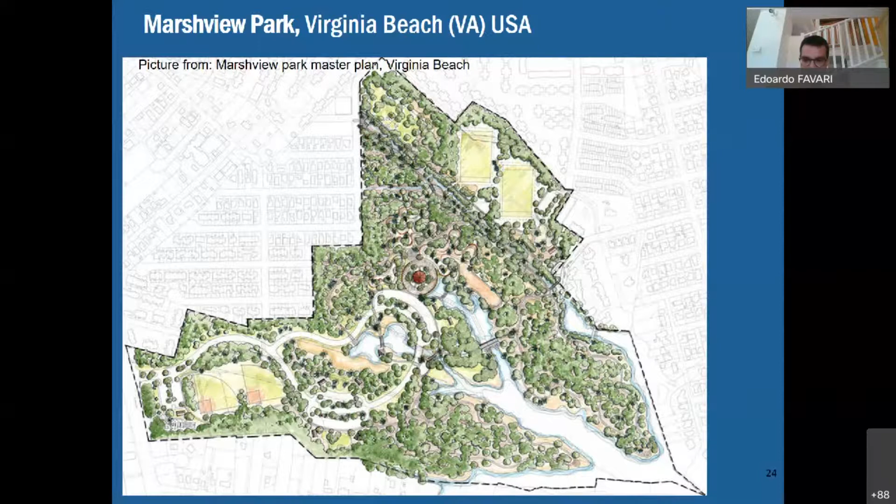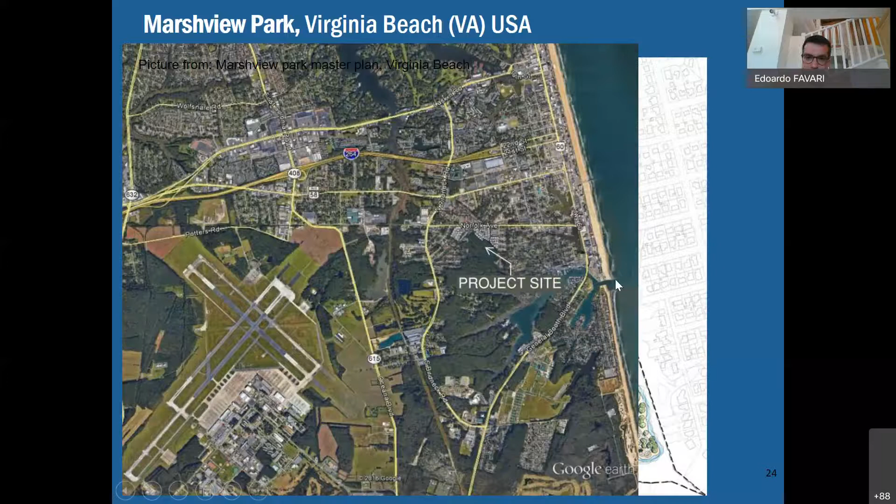Okay, so regarding the quality of life, there was an existing park, and it has been made more accessible. In addition, in the area there are 6 acres of wetland, so it is something that has been kept available, not changed, and people going into the park can enjoy this natural area.

The pathway I already mentioned also has a social value, because it allows people to go from one side to the other of the park safely. And the separated, fenced area for dogs also improved the safety for people frequenting the park.

Regarding leadership, again, also in this project, a lot has been done for the commitment. The community has been involved also in the planning part, and not only in the specific project. One very good thing that I think is a critical success factor of this project is that several pictures I took here are based on a master plan developed for this park.

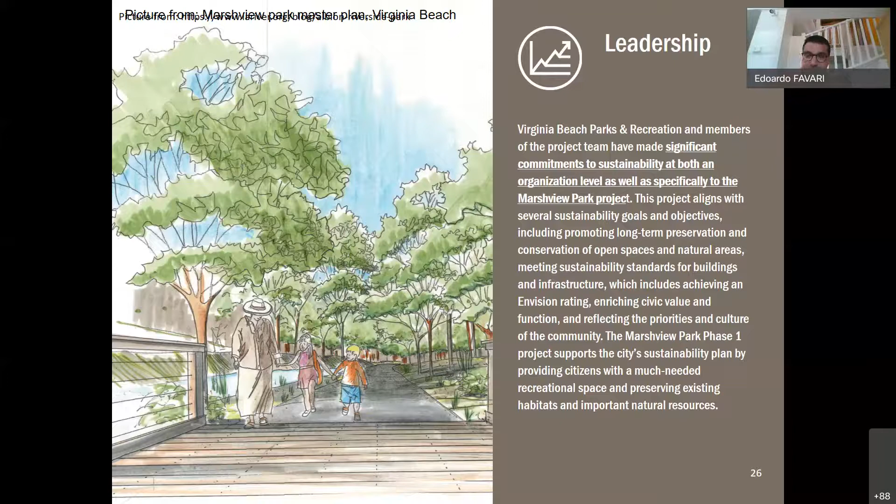Regarding the location, a lot has been done from the project team's perspective to use local materials. Obviously, if you use local plants, local materials, aggregates, and soil, you reduce so much the environmental impact of building. This is very obvious to everybody, but I see in several projects that it is not applied as a principle.

For the natural world, again, you see the removal of invasive species, which we have already seen in another project, and the minimization of impact on existing habitats. We mentioned that 6 acres has been kept as wetland—it's not part of the park used for amusement of people. In addition, to extra protect these wetlands, signage has been included to let people be aware of the park and of the wetlands.